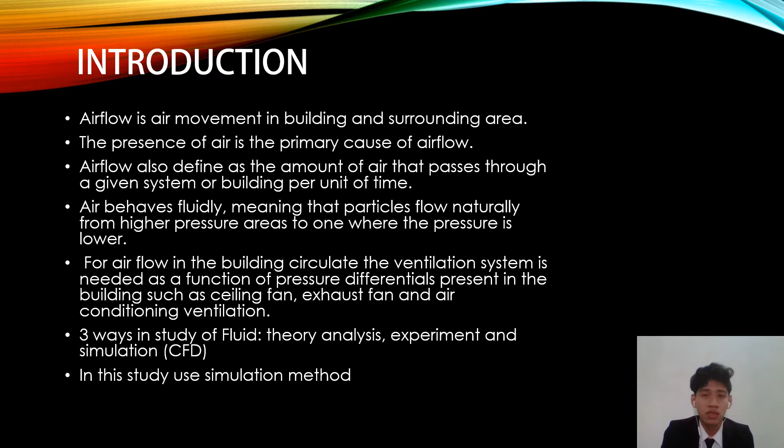Next, I will continue with the parameters related to the airflow study. First of all is indoor air quality: air quality within a building and structure, especially related to the health and comfort of the building occupants, meaning the quality of air produced in the building gives comfort to the humans that enter the building.

Next is indoor air humidity, which is the amount of moisture in the air. This is related also to indoor air quality, but it is something different between them. So I will conduct a study on both.

Next is carbon dioxide concentration in the building, meaning the amount of carbon dioxide released from humans inside the building when they go to pray. For my study, since it is in the mosque, this is the time when they go to pray. And for heat transfer, it is the amount of heat they release inside the building when they are there.

Heat always moves from the warm area to the colder area, and there are 3 ways of heat transfer: conduction, convection, and radiation.

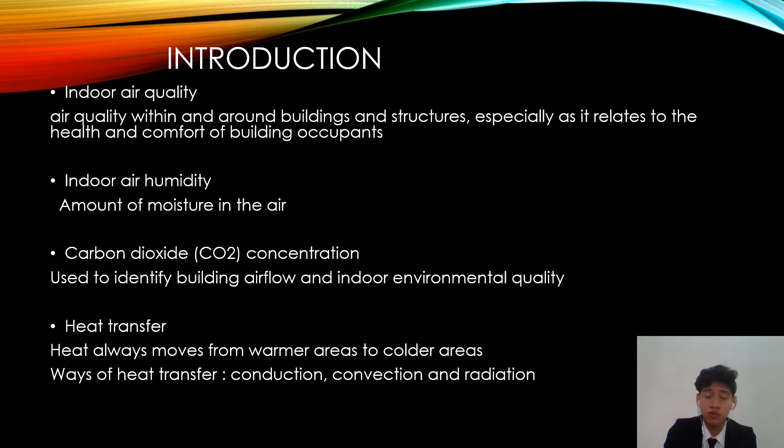Next, we will proceed with the literature review, meaning research that I have found from journals and internet sources that can serve as guidance for me to complete this study.

For example, the first journal I found is 'A Review on Windcatcher for Passive Cooling and Natural Ventilation in the Building' by Fatemeh Jomehzadeh.

Next is 'A Review of Integrated Radiant Heating and Cooling with Ventilation System' by Chen Zhanga. Both created simulation studies showing a critical and normal section for inside the building. For example, in Fatemeh Jomehzadeh's study, the right section shows a critical area of airflow and thermal comfort, showing airflow, air quality, and thermal comfort inside the building.

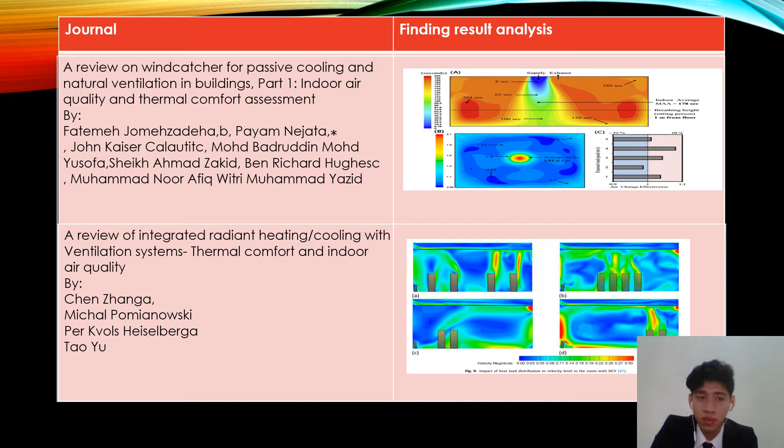The blue area shows a safe area, meaning the airflow in that area is good. Next is from the journal 'Simulation-Based Feasibility Study of Improved Air Conditioning System for Hospital Operating Room' by Zhiqiang. The result showed the velocity simulation analysis inside the operating room, showing air movement similar to the previous journal I mentioned before.

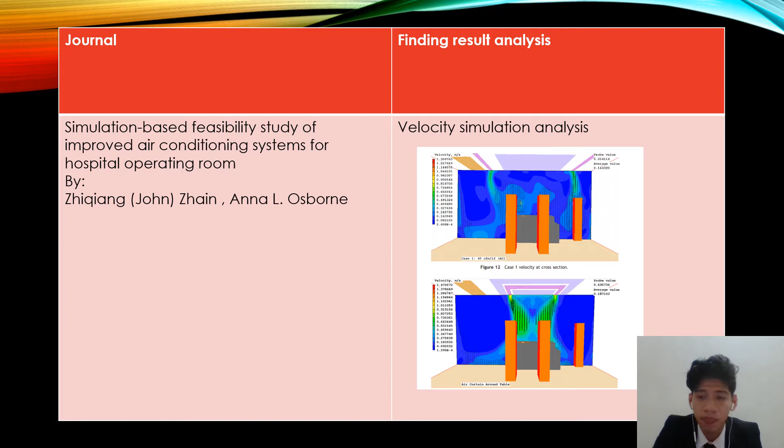The next finding is from the journal 'Effect of Ventilation Strategy on Infection Control Inside Operating Theatre' by Rafat Al-Waked, which also shows the air velocity vector within the operating theatre. There are 3 cases, showing the velocity analysis within the critical and normal parts of the surrounding operating theatre.

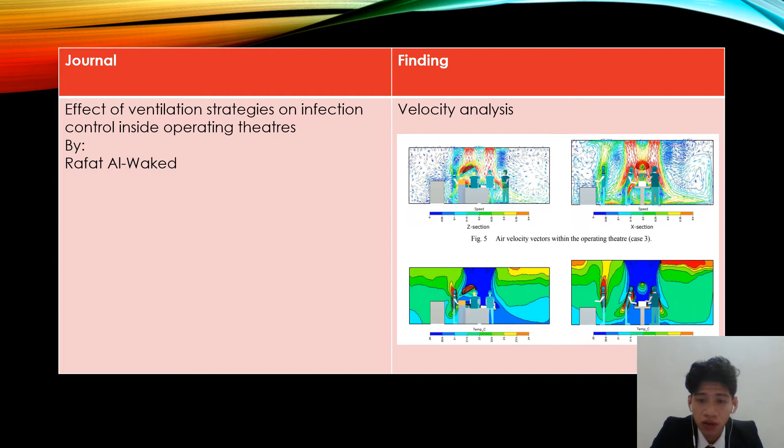Next is 'Experimental Investigation of Thermal Comfort and Carbon Dioxide Concentration in a Mosque: A Case Study in a Warm Temperate Climate of Yalova, Turkey' by Ahmet Yuksel. The result they found from this journal is the indoor air temperature and relative humidity presented mean values of the data obtained by the 9 data loggers. They showed a graph of carbon dioxide concentration over time.

So from all the research results that have been gathered, I will use this as a guidance for me to create my result at the end of this study.

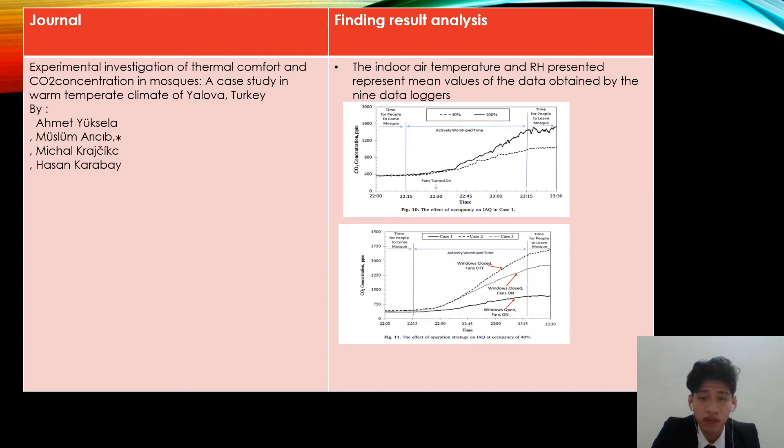For the problem statement of my study, the idea for creating this study is due to the COVID-19 pandemic. There is an increased number of people affected by the virus, especially when they go to public areas or buildings.

So the need for airflow, to prevent and minimize the chance of virus spreading inside the building, having good ventilation and good airflow efficiency is an important factor. By conducting this study, maybe I can prevent and minimize the chance of virus spreading inside a public building, especially when people go outside.

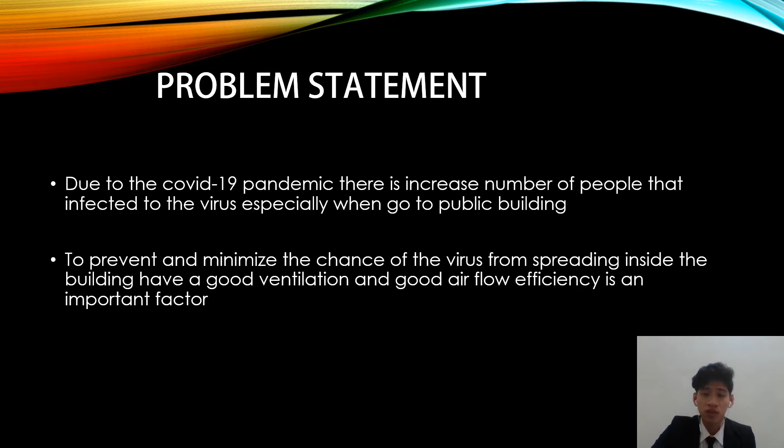For the objectives of this simulation airflow study, first of all is to do modeling on a simple human model with heat generation and carbon dioxide produced at a certain time, which is the amount of heat generation and carbon dioxide produced by a human during the prayer, for example in 2 or 3 minutes.

Next is to simulate airflow inside the small mosque with an available number of people, using air conditioning ventilation. Also for the distance between humans inside the building, we will use the SOP during the COVID-19 pandemic, which is 1 meter from each other.

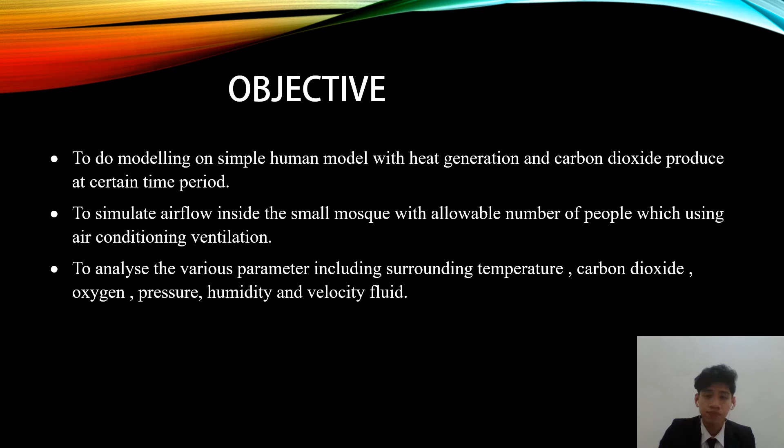Next, for the scope and limitation of the study, in this simulation airflow study we will use the software to conduct a simulation inside a small mosque.

And for the human model that will be created inside the mosque area, it will have a distance of 1 meter between each other, following the SOP for COVID-19 pandemic. The site study is small in size, 14 meters by 20 meters, which means 280 square meters area.

The parameters of analysis are surrounding temperature, amount of carbon dioxide, oxygen, pressure, and velocity inside the small mosque with a specific number of people. So this is the parameter related to the airflow study, and all the parameters will be found by the end of this study.

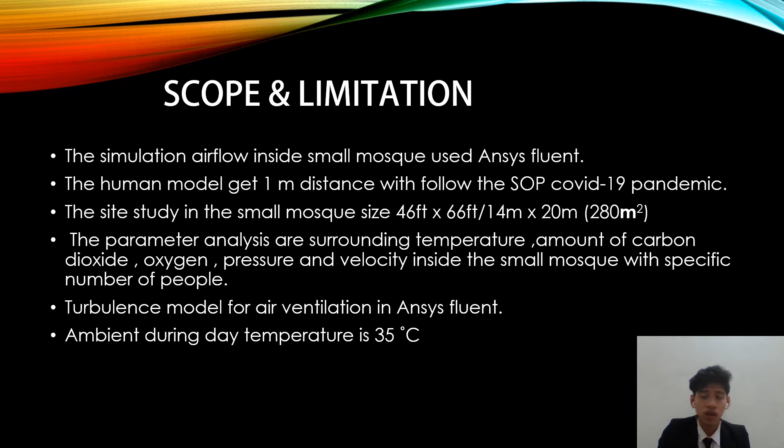For the turbulence model, it will be created by air ventilation in the mosque. For the temperature of the study, it will be 35 degrees Celsius. This is the ambient temperature during the day.

So next, I will explain the methodology I have used in this study. Basically, I have 10 phases of methodology.

The first one is document analysis, where I make research and an initial study about journals found on the internet. Then I use the results of other researchers' findings as my guideline to apply in my study as well.

Next, I identify the important parameters of the study from the previous journals that have been found. I use the parameters they used as my guidance also for my study, and select which parameters are related to my study.

Next, I start the design and development of the 3D modeling of the mosque and the human model, using the standard measurements that I found for the nearby mosque that was researched. For the human model, I also use the standard measurement of the human body.

Next, after finishing developing the 3D modeling, I will assemble the human model inside the mosque model. Next, after assembling all the 3D modeling, I import the 3D model into the CFD software.

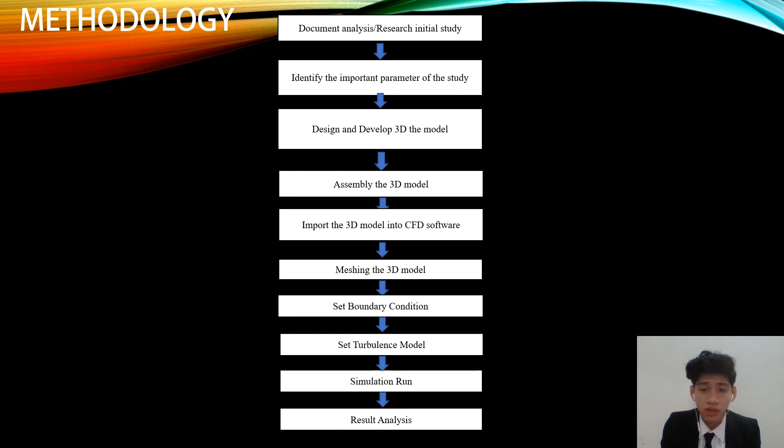I design the model using SolidWorks software, and I import it into the CFD software, which is ANSYS Fluent software. Then in Fluent, there is a meshing method, meshing process, and setting boundary conditions, and setting the turbulence model.

After finishing all those phases, we can start the simulation run. After running the simulation, we can find the result analysis and make a conclusion about what has been found through this study.

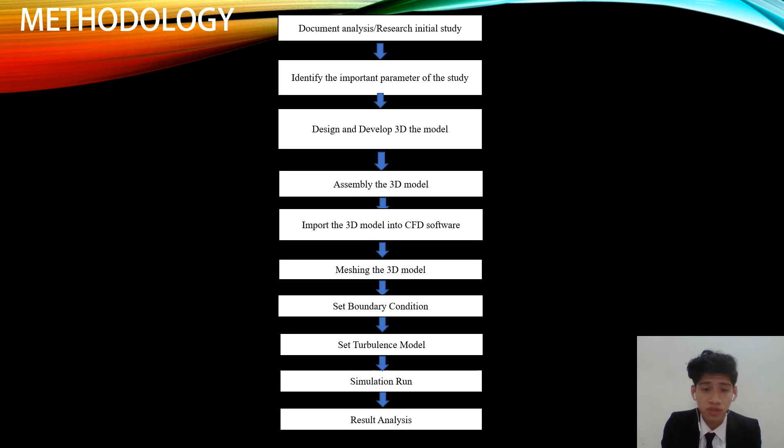Next, we proceed with the step-by-step analysis process that has been done. First of all, we start with the 3D modeling of the small mosque and human model. This model is created using SolidWorks software.

The dimensions I use to create the model of the mosque are based on findings from a nearby mosque. And for the human model, it's just a simple human with standard measurements.

Then after finishing the modeling, we proceed with assembling the 3D modeling, which means I will assemble the human model inside the mosque following the SOP during the COVID-19 pandemic, which means 1 meter distance between each human model.

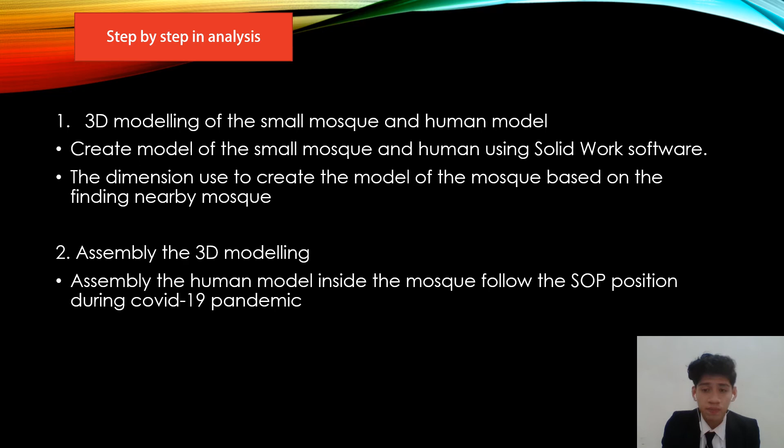After finishing the assembly phase from the human model inside the mosque, the 3D model will be imported into the workbench of Ansys Fluent. The model needs to be saved in IGS format before inserting it into Ansys Fluent, because Ansys Fluent can only read that file format.

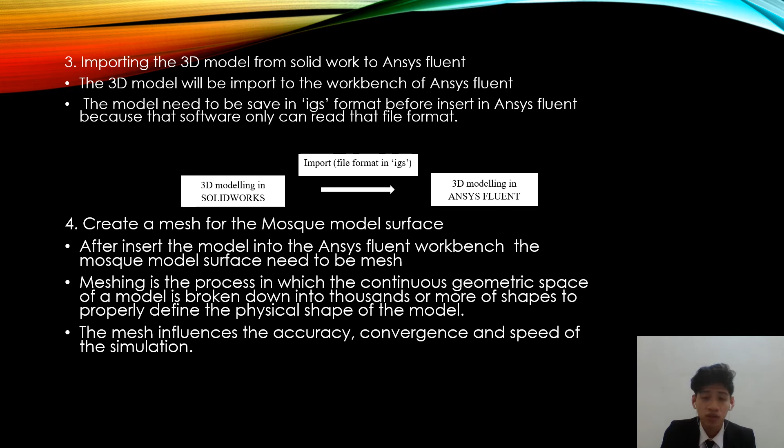After successfully importing the 3D model, it will be inserted into the mesh process. Meshing is the process in which the continuous geometric space of a model is broken down into thousands or more shapes to properly define the physical shape of the model. The mesh will influence the accuracy, convergence, and speed of the simulation.

After finishing the meshing process, we will continue with defining the parameters and boundary conditions. For my study, the air conditioning system will be the inlet, and the window and door will be the outlet.

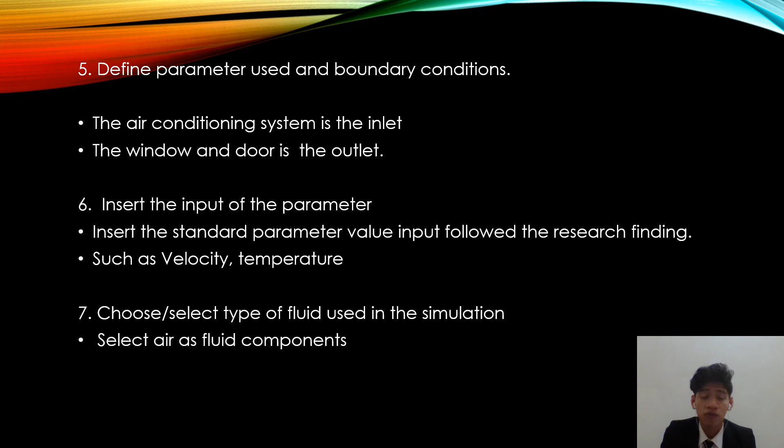Next, we will proceed to insert the input parameters, following the research findings, for example the velocity value and temperature value. Next, I will choose the type of fluid used in the simulation. For this simulation, I will use air as the fluid component.

After selecting air as the fluid component, we proceed to set the turbulence model of the study. In my study, I selected the Spalart-Allmaras turbulence model for this simulation of the airflow inside the mosque building.

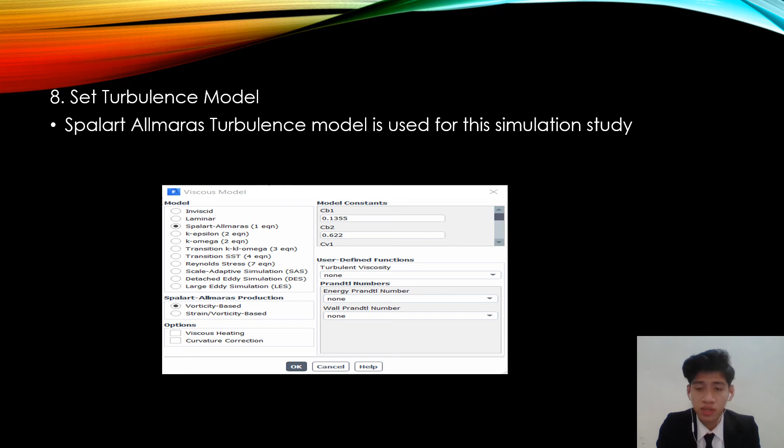Next, I will simulate the airflow inside the mosque, which means running the program. I will run the model in the Ansys Fluent software to know how the airflow behaves inside the mosque.

After obtaining the airflow results inside the mosque, I will analyze the parameters, for example temperature, carbon dioxide, oxygen, humidity, pressure, and velocity of the fluid inside the mosque area using graph analysis. Next, I will define the amount of heat and carbon dioxide released by humans inside the mosque.

The last phase is to record the results, record the parameter study, and make conclusions about the findings that have been found.

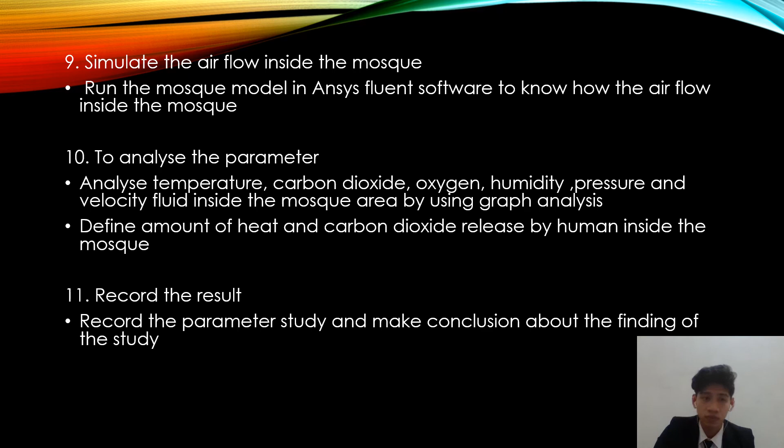Next, I will proceed to the expected result. At the end of the study, I expect to produce the 3D model for the small mosque and human model.

Next, I will demonstrate and simulate the airflow inside the small mosque model using air conditioning as the ventilation system. I will determine all the parameters related to the airflow, as mentioned before, which are velocity, humidity, carbon dioxide, and oxygen level.

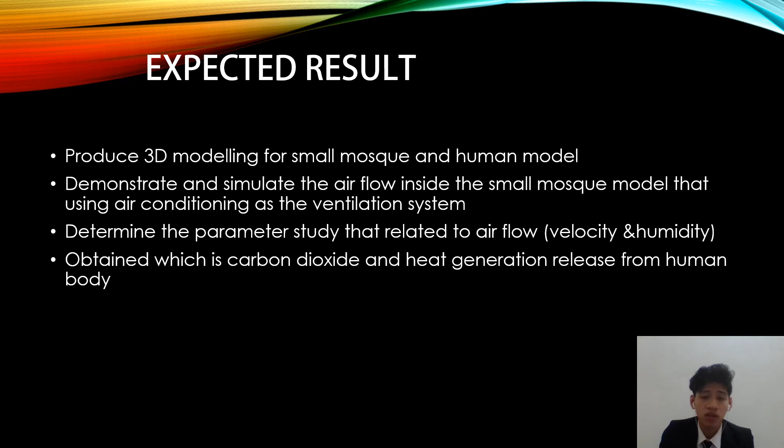Next, I will obtain the carbon dioxide and heat generation released from the human body. This is a preliminary result that I have got so far.

This is a mosque model that has been created in SolidWorks. The area of this mosque is 46 feet by 66 feet, which means 14 meters by 20 meters.

For estimation, the green side shows the positioning of the human model that will be placed inside the building, following the SOP of the COVID-19 pandemic, which means 1 meter from each other.

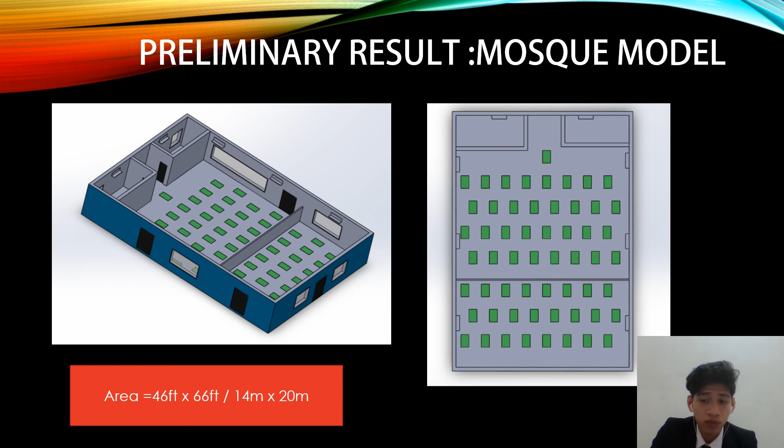Next, this is basically the layout dimension in meters of my mosque model. For the window, door, and all dimensions, the thickness used is 0.3 meters.

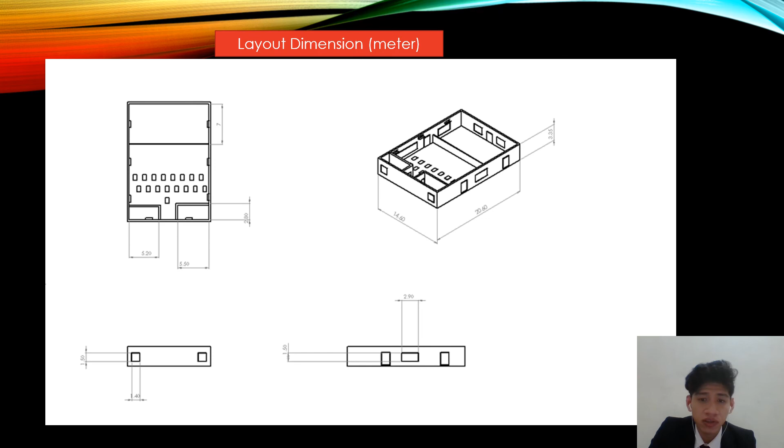Next, this is basically a testing of the assembly of the human model and air conditioning system in a mosque model that I have got so far.

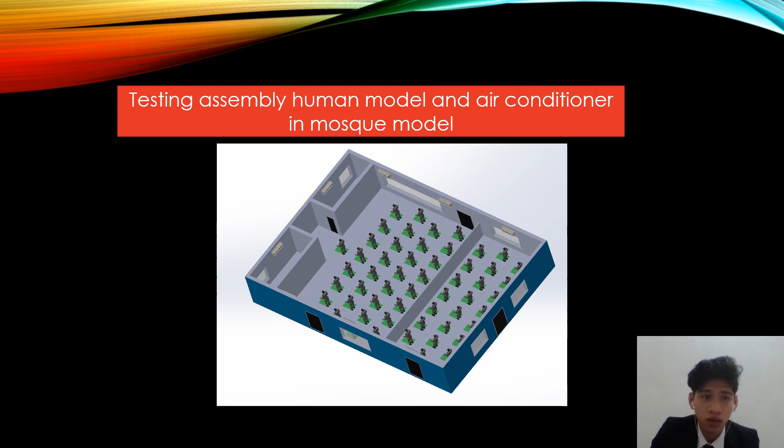For this, I have added a roof at the top to show that, because in the CFD study, we need to make sure that all the parts are closed so the analysis can be done correctly.

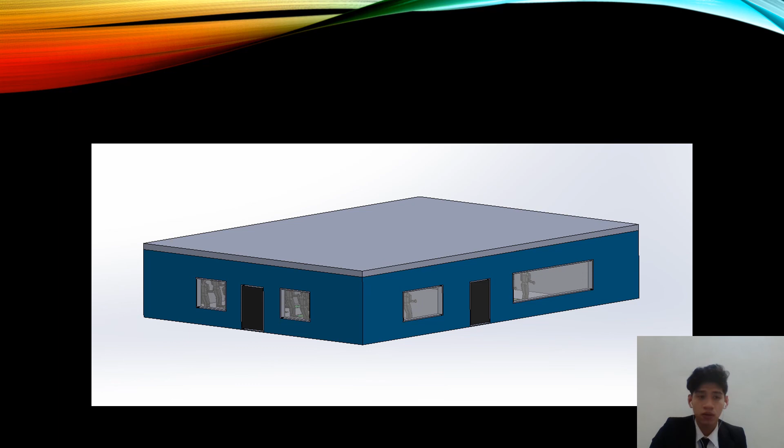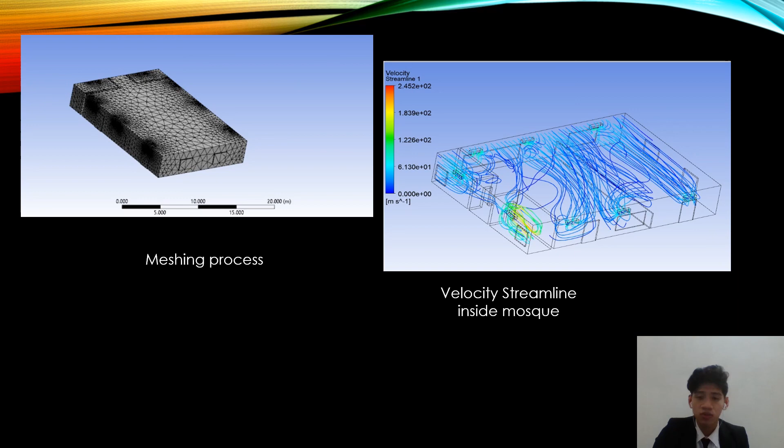Next, I will show the airflow simulation obtained from the preliminary result of my small mosque model, demonstrating the airflow movement inside the mosque. For information, the velocity used is 15 meters per second.

The blue movement represents the airflow inside the mosque.